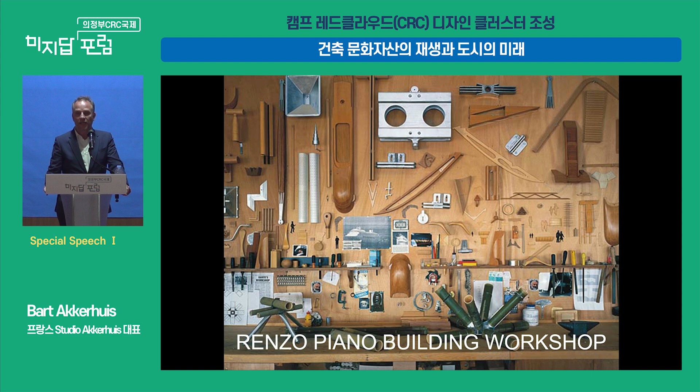He helped you go to the semi-finals in the 2002 World Cup. He's an important man. Another important man in my life is Mr. Renzo Piano, an architect from Italy. He's a bit older than me, he's 87 at the moment, and he has been my master for 10 years. I worked for him for 10 years in his Paris office. Renzo Piano is the head of the Renzo Piano Building Workshop, where I was an associate.

He's mostly famous for Centre Pompidou in Paris. I worked a bit later — Centre Pompidou was built when I was born, so I didn't work on this project. But I worked on several other projects in the Paris office, notably quite some big projects.

I also worked on other different projects, like the Paris Courthouse, the law courts for Paris. The beautiful thing about this is that Renzo always tries to make a place for people in this building. So again, he doesn't just make a skyscraper, but he makes a garden for the workers to go out, even on a high floor at 180 meters. He plants trees with a beautiful view to the Eiffel Tower. I think that characterizes the architecture of Renzo very much.

I also worked for Renzo Piano a bit on some Korean projects. This is Yongsan — luckily or unluckily, it never happened, depending on what side you are. It's a 620 meter tall tower in the Yongsan district. It was the highest in the whole Yongsan region.

Again here, Renzo insisted that although we built this big tower for this corporate client, the top of the building, the last 16 floors, are actually public. For him, it's very important that the public gets the space even at the top of the tower, and it should be for free. It should be accessible for all. I think that quantifies a lot the architecture that I like, and also what Renzo Piano stands for.

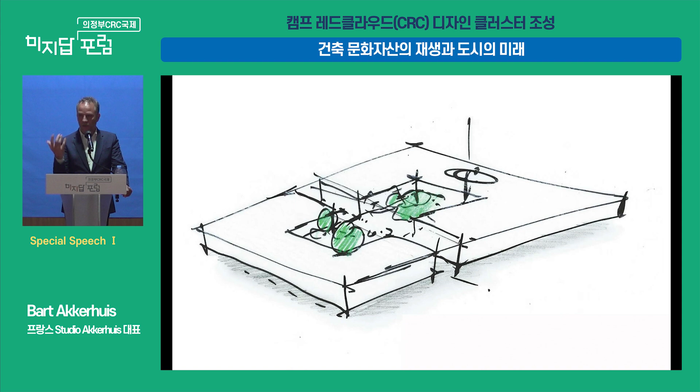But from the inside, our first point of start was to create a place for the people. So we started with the piazza — the Italian word for plaza, which is very important in Renzo Piano's architecture and also in mine. It is the place where people meet. So first we create a place where people meet, where people are invited, and then we build the shops around them. I think that works in the end, because it becomes a place where people meet, where people have joy, where fathers meet their grandchildren, where they have a coffee. And maybe in the end, yes, they go shopping, but that's not the most important place.

So even in suburban America, we try to create this space for people on a very small scale, just a very suburban shopping center, but it works. I think it's always very important to keep in mind that when you construct your buildings or your projects, it should be for the people.

So my firm, I started my firm 10 years ago in Paris. I stayed in Paris. We have a beautiful office in Paris. We are about 40 to 50 people from 19 nationalities, so it's a very mixed group of people, which gives a dynamic influence from different cultures, which I think is important, and this mix is always a very important thing in my office and in the work we do.

And we don't only work in France, but we try to work in the whole of Europe, and even trying to work worldwide. So we have some projects in South America, North America, in the Middle East, in Africa, and we also have some partners in Korea. We're trying to win some work in Korea, and I'll show you some projects later about Korea.

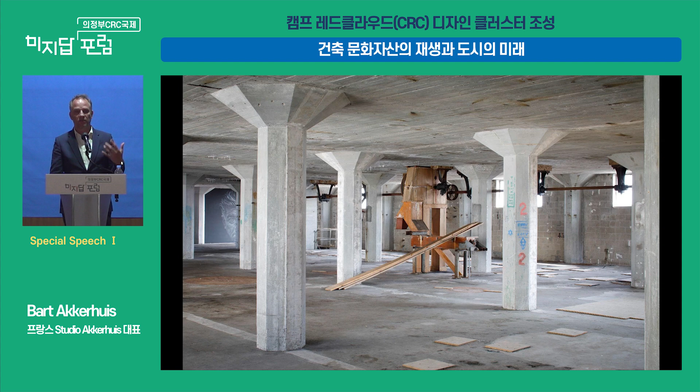Here you can see the buildings during the ages. This is more or less how we found it when we arrived. Sometimes the buildings are quite beautiful from the outside, but mostly they're very beautiful from the inside. There's beautiful concrete structures, and we find beautiful architectural elements. Sometimes it's concrete, sometimes it's iron and brick, and sometimes it's steel and brick.

And as we found that building there, we started to do the buildings one by one. We didn't do everything at once, but we took one step at a time, because sometimes a project like this you need to eat the elephant one little bite at a time, otherwise you won't arrive at your destination. On this model you can see that we transformed all the buildings, but the white part is the buildings that we added, so we also constructed some new buildings, or added some things to the top.

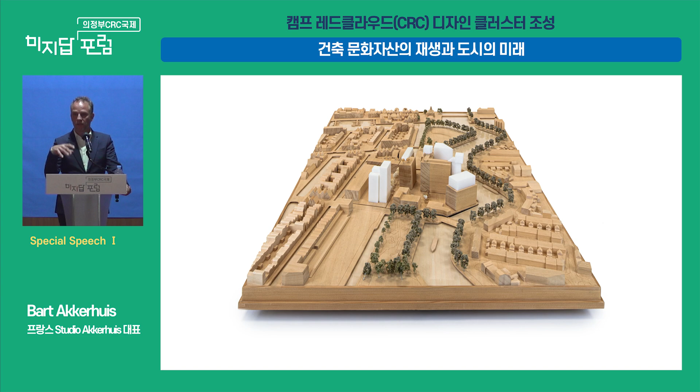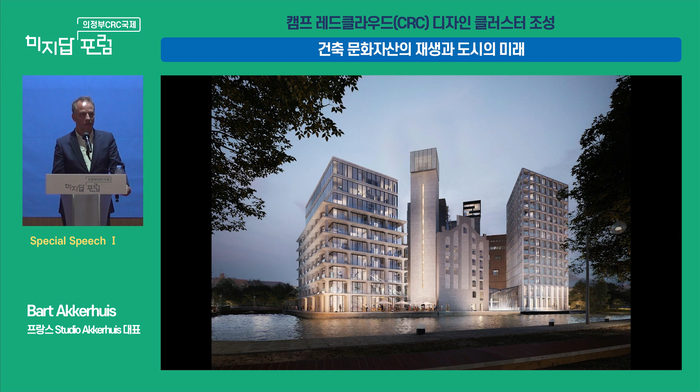This will be the result when it's finished in 2027, so about 3 years from now. So we will be working 13, 14 years on this project, and my client will have been working 35 to 40 years on this project. He was quite young when he started, he's quite old right now.

We already finished some buildings. This is a building we finished, it's a housing project. There's a park designed by Piet Oudolf, the Dutch landscape architect, who is well known for the High Line. He also built something now, at the moment, in Korea, I think.

Here you see parts of the park, but we also built some new structures. The building I'd like to talk to you about today is the Meelpakhuis. It's the building on the left, the brick building with almost no windows. The client wanted to transform this one into a housing project.

I think this is a lesson we can learn for this project. So what is important to keep about this building? Because if you need to make a housing project, you need to make windows, you need to make balconies. Is that really possible with this building?

So we looked clearly at this building, and for us, the structure was actually the most beautiful part. The structure was the monumental part of the building. It wasn't the brick facade, which is quite boring, but it's the structure.

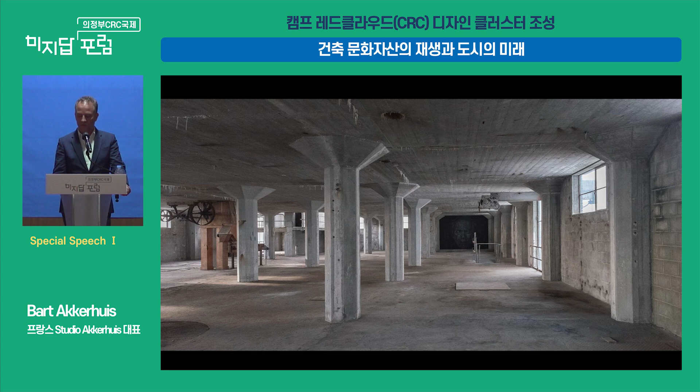So what we decided to do is to peel off the brick facade and leave the structure exposed, then put a new glass volume inside of the structure and put the functions in there.

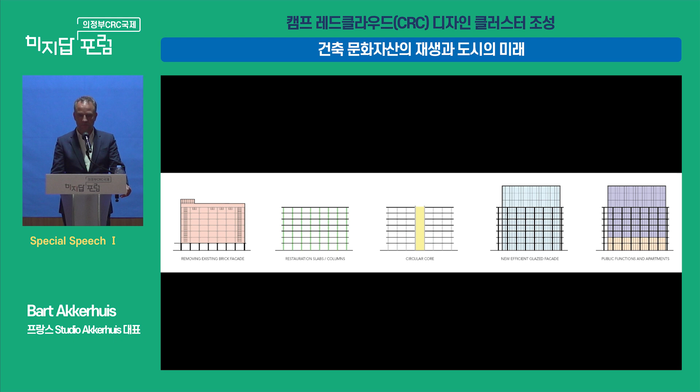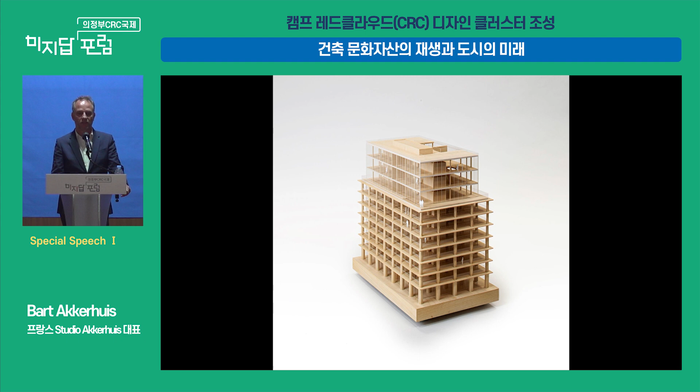On this floor plan, you see that the facade is moved inwards, so it gives this space to the columns outside. Here you see the model.

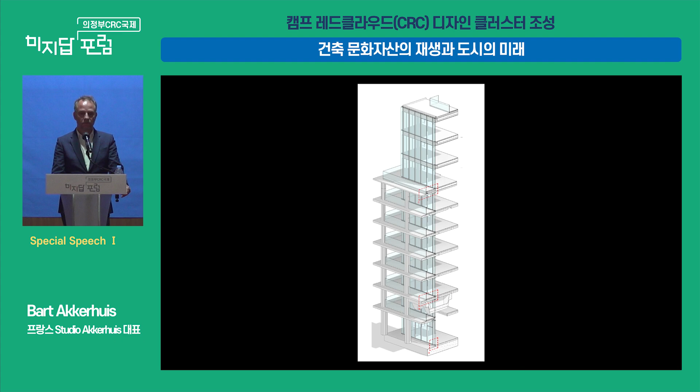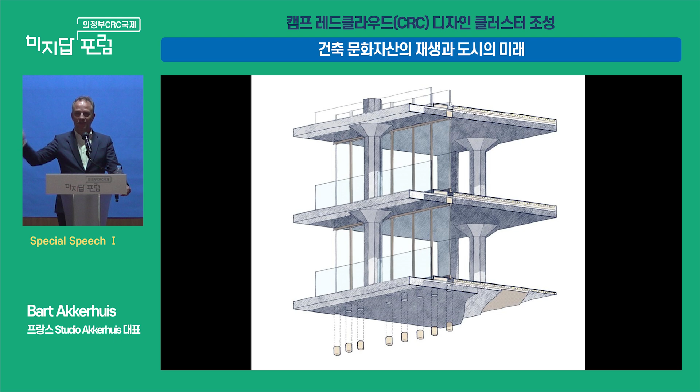Some sections through the building, and you see the glass volume going through. I won't bother you too much with the technical detail, but it's quite complex actually to say, okay, we put glass from outside to inside through the concrete. It becomes a very complicated architecture detail to have the concrete ceiling going through, but I think in the end we succeeded.

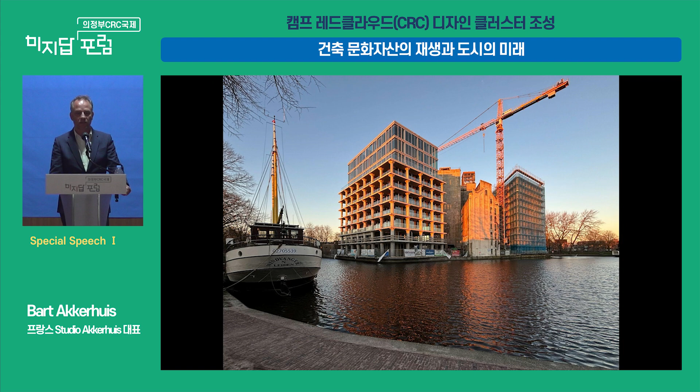So here you see the final result. We took off the brick, the columns become the architecture, and you see the glass volume going through the building.

Oh, sorry, I have to go.

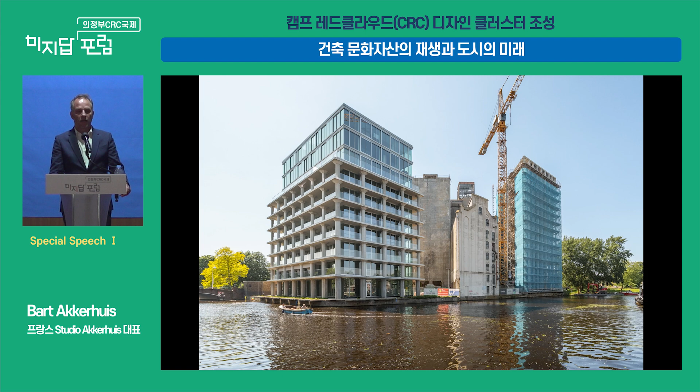Well, it doesn't matter. What's interesting also is, a beautiful Dutch canal by the way, but what's interesting is that you see the columns now are getting smaller from the bottom to the top.

And when you're walking in the building, you can't really see it, but now suddenly, because the columns are exposed from the outside, you can see the columns becoming more slender towards the top.

The second project I'd like to show you in Europe is in the south of France. It's quite interesting, but it's a bit like this site. It has low-rise buildings. There's some beautiful architecture on the side, but not everything is used.

And what the client wanted to have here is a mixed program, but also quite dense housing. Well, dense housing for Europe. I think the housing density in Korea is sometimes a bit more extreme. But it's a beautiful site.

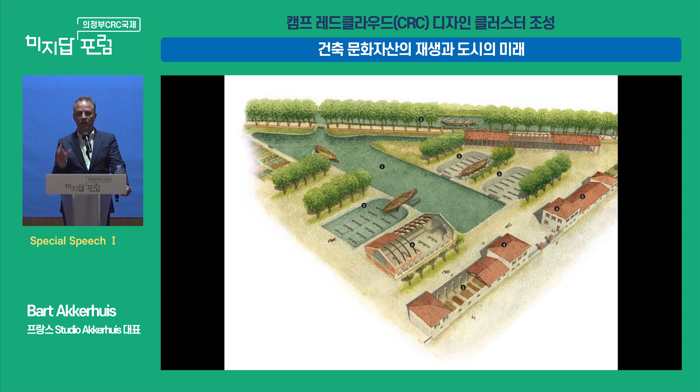It's along the Canal du Midi. The Canal du Midi is the canal that goes from the Atlantic Ocean to the Mediterranean Sea. It's built in the 1600s. And along the road you have beautiful dry docks where they repair the boats. We found some of those dry docks, and those are given on the site.

Then the client wanted, as I said, quite a lot of housing. So where do you put the housing? We couldn't really build it in a tower because Toulouse, where it is built, is a very low-rise city. So we couldn't build a tower.

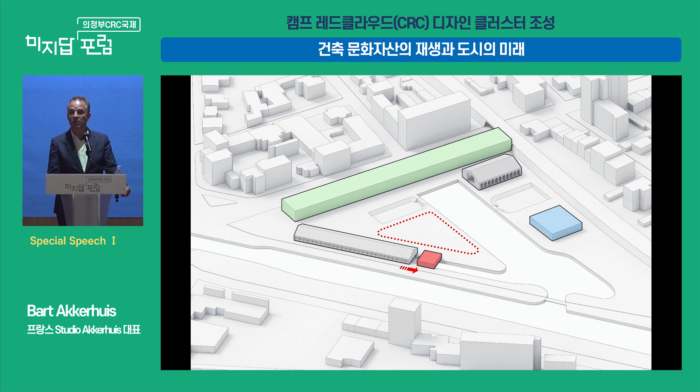So it would be a long bar, or it would be multiple housing on the site. But if we put multiple housing on the site, then we lose the public space. So we decided to have this long bar at the edge of the site to preserve the public space and keep it for the public.

So then we lift it up, so the entry to the site becomes open and still transparent. And we add programs, some to the existing structures, and we add cultural program underneath the housing. And we create connections with the bridge.

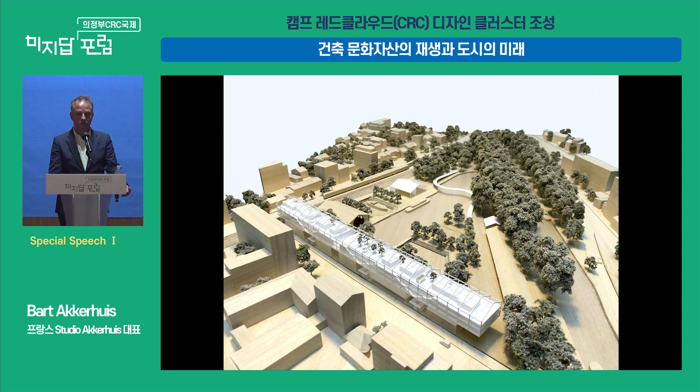So here you can see it's a mix of program, cultural, leisure, restaurants, cafe, co-working, and housing. This is the model we built. This is the view from the other side.

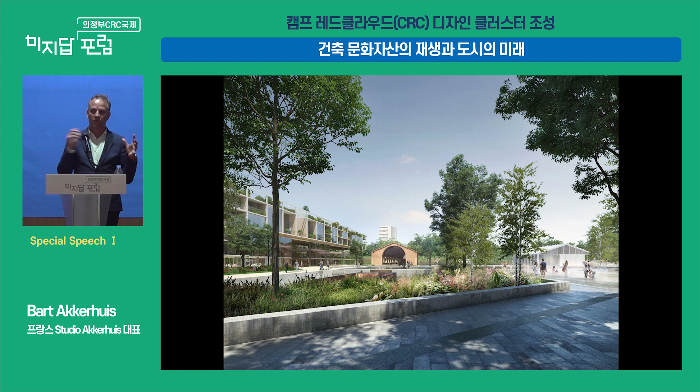Here you can see that you start to create a dialogue with old and new, so you can have the modern buildings and the old buildings together. We create a space for the people. Again, here it's the old shed that we extended with a new shed, old and new together, but it really can work as an architectural dialogue.

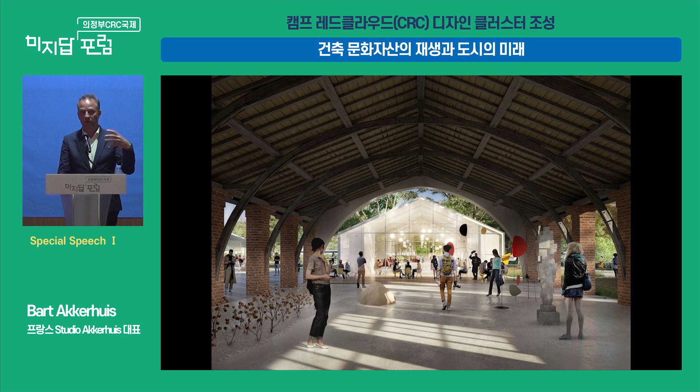We create, because we leave so much space around it, enough room for the cultural aspect of the site, enough room for the people to meet and to have a cultural program and a public space. For example, this structure was used as a concert. Again, leave space for the public, very important. Leave space where people can meet, and create the piazza as such.

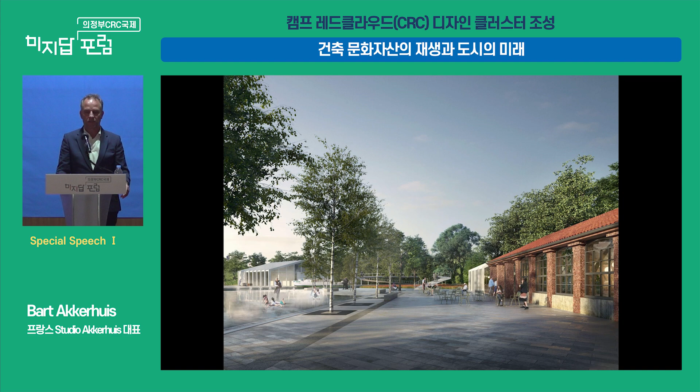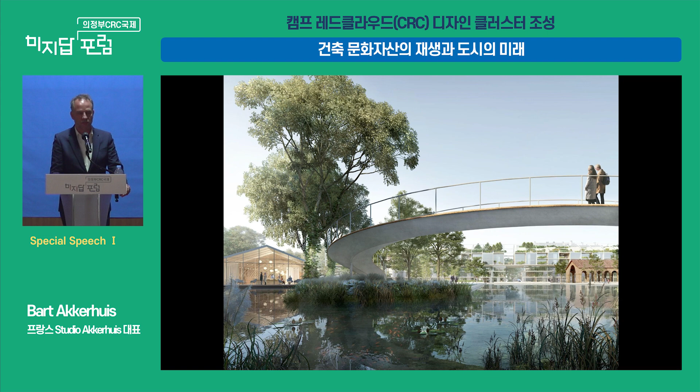Create connections to the other parts of the building. This is a park nearby that was actually blocked off by the water, so we create a new connection towards the park. It's very important to look at the surroundings. Where can you connect? Where can you make the links for the project? I think that's something we always try to do in our architecture.

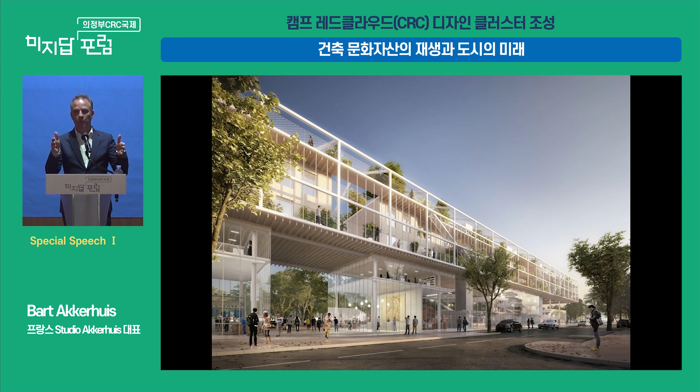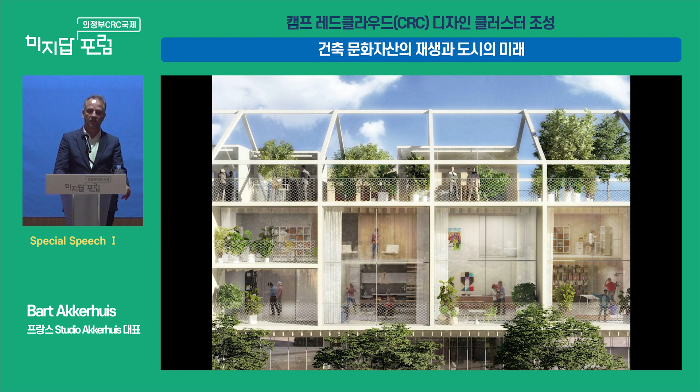And you see here that this is the housing. We lift it up, keep the corner open to get people on the side and to have the transparency so people see what's happening. Again, underneath the buildings, there is a passage, an opening with transparency so people can look towards the building site. And you see the housing with the outdoor spaces, public and private outdoor spaces in the building.

The third project, I have to go fast, I think, so I'll go a bit speedy, sorry about that. The third project is quite similar to this. It's a military site in Holland, which we're working on right now.

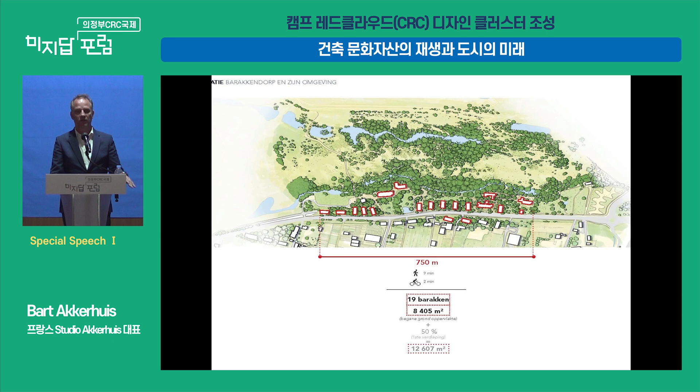It's a beautiful landscape in the dunes next to the sea. What we're studying here is a mix of functions, because next door there will be a very big development in the end. We're not going to build on site because it's in nature, but we're going to build the social functions and community functions in this project. So we're looking for an interesting mix with focus on culture and community.

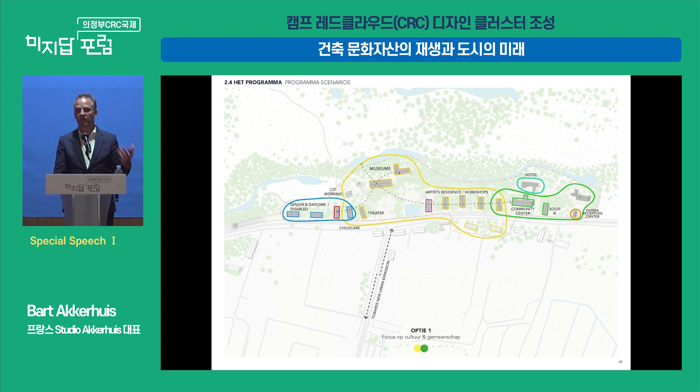Here you see the mix of the different functions. We have support of the neighborhood. There's of course not only the cultural heritage, but also what I call the immaterial heritage. So what happened there? What is the legacy of the history? You also have to think about that. Can there be a museum to commemorate the 1940-1945 war? Can be elderly care, can be child care.

Oh, this is in Korean for me.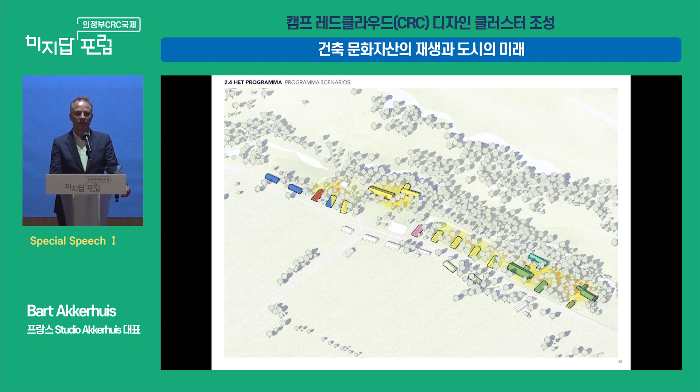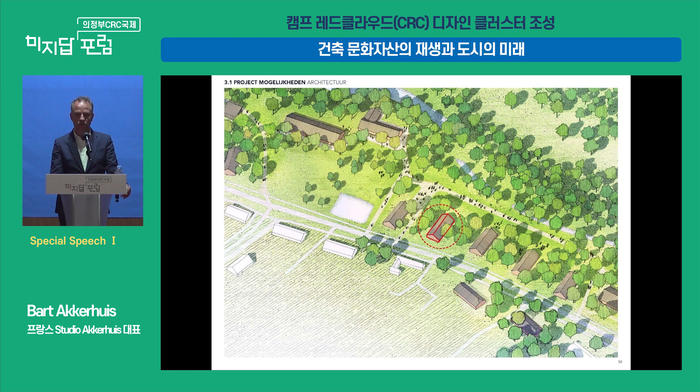Here you see the pavilions on the side, the barracks, and how we see them in nature, and how can we preserve both. So here we're just giving some ideas, and this might be some ideas that you can use on this site, what you can do with the barracks. We look at 4 different types: cultural, housing, working, and social. The culture could be a community theater, or used for exhibitions.

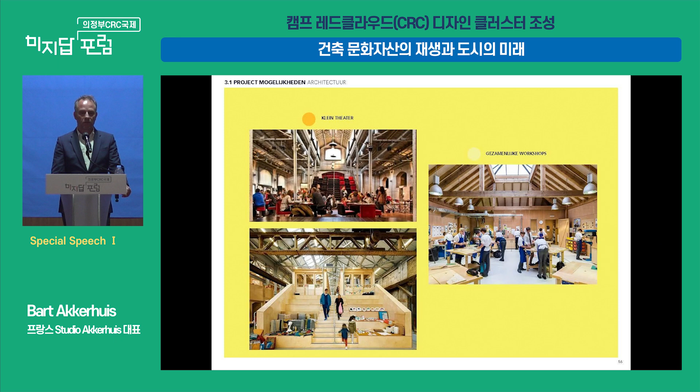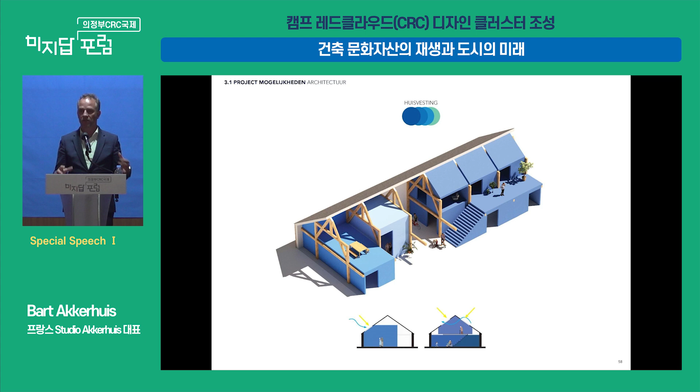Here you see some inspirations we had for this site. Another inspiration: restaurants, workshops, or markets. The housing could be housing for the elderly, where there's assisted living, or daycare housing where the elderly only spend their day, possibly combined with childcare. We keep the existing structure and build something inside it, preserving a structure like this, but trying to build something in there. Here again some possibilities: co-working.

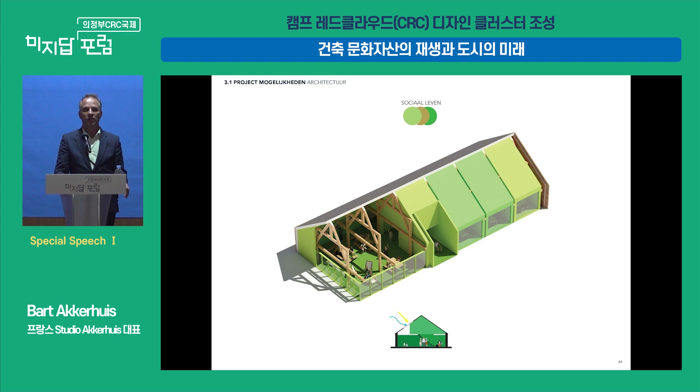Co-working for the local community to have an office space, to go there, to meet. Startups could be there. And there could be a social function. But the possibilities are endless - you could have a restaurant, cafe, wedding venue. But the important thing is we create a space for the community, and I think that's an opportunity you have here also, to create this community.

I think the other interesting thing is you should build for different generations, for the young and for the old, and you should mix those functions. So you really create this sense of community and this sense of place.

Another project where we try to do that - and this is maybe another interesting thing, because I think one of the speakers before said that they have to be very careful how they attack this plan, because it's costing a lot of money and it will be very difficult. But what I think is very important is that as soon as possible you take possession of a site like this.

So you make some instant or pop-up spaces to create that community. So you start engaging the community, you start engaging the artists, and you create a place for the people again.

This is the project I said, which looks a bit like the structure we saw here on site. It's a temporary theater made out of bamboo, designed by us and built by us with volunteers. It's built in 2 days, and taken down in 1 day. And it's supposed to travel, so you can travel to certain areas.

And the good thing about this project is that it is really done by the community, and the community uses this for plays, etc. It has up to 250 seats in different configurations, so it's very flexible. And it's built with bamboo, so very sustainable, low cost. This project really costed nothing - okay, you need a lot of volunteers, but the structural cost and building cost is very minimal.

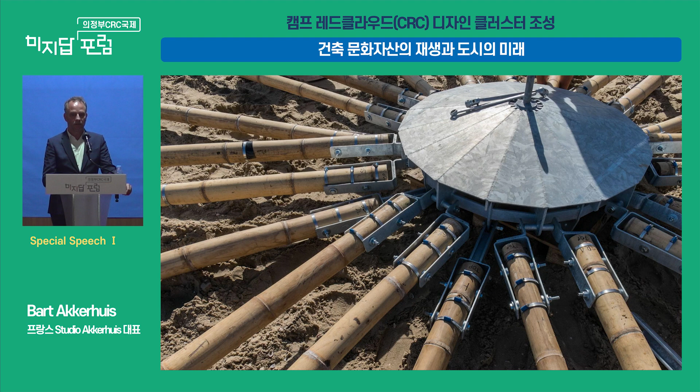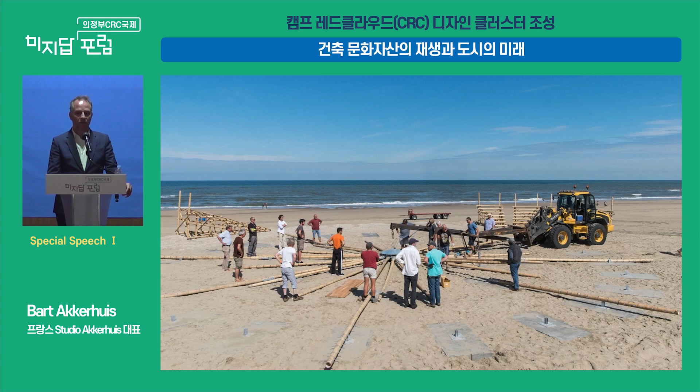So I'll show you very quickly the construction sequence. First of all, we built the center, the central unit. Then we lift it up. And here you see that we put in a central pole. The central pole holds the structure up for the moment.

And then we start folding out the canopy, and we fix it to the vertical poles. It's a very low-tech connection, so everybody can do it. This is one of my architects doing it - well, if an architect can do the connections, then it should be quite simple.

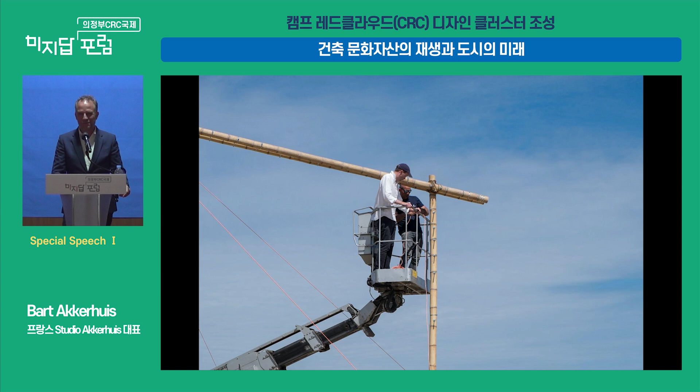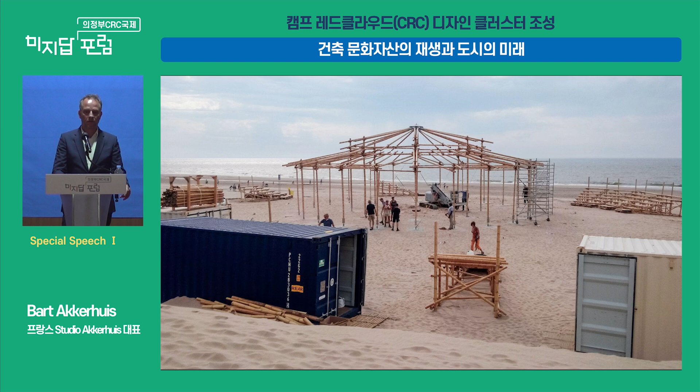Here you can see it. And then we built the inner ring first, and then we built the outer ring slowly. And you look, it starts already to look like the model that I just showed you before. Here's the structure standing up.

And then we add the cover, the tissue. So what we do in the end, because the structure is totally central, we can take out the central pole. It's like a circus tent, actually, the way they build circus tents - they first build the structure, and then the outer ring holds up the structure, so the central pole is then taken away.

And we add seating, which is also made of bamboo, off-site, and this doesn't have to be reassembled every time - it's just put back in storage. We add some soft seating for comfort, so people are comfortable during the performances. And then in the end we have our theater, and you have the spectacle.

And I think it's very important for placemaking - again, engaging the local community. Before you can start, it always takes time, there are procedures, you're looking for money, but try to make already something of this place. Try to already take possession of the site with the neighbors, with local artists and the community.

This is on another location, this is in a flower field. This is not a render, this is a real image.

We've put it on multiple projects - then 5 projects in South Korea with our friends from Archi Workshop, who are sitting here. These 5 public projects we did in Korea have 3 things in common - well, actually 4, because they're not built, that's one. They were all competitions. They maximize the site condition. They create an attractive public space.

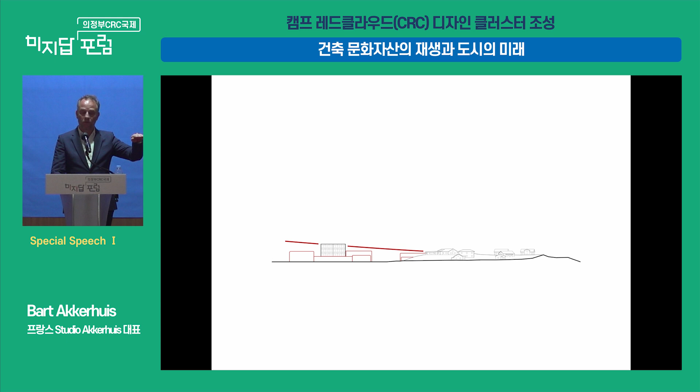So where did we start? What we have is the existing buildings on a little hill. Our idea was to extend this hill towards the left and build a program underneath. So a new history museum built underneath the hill, and above the hill there will become a new park.

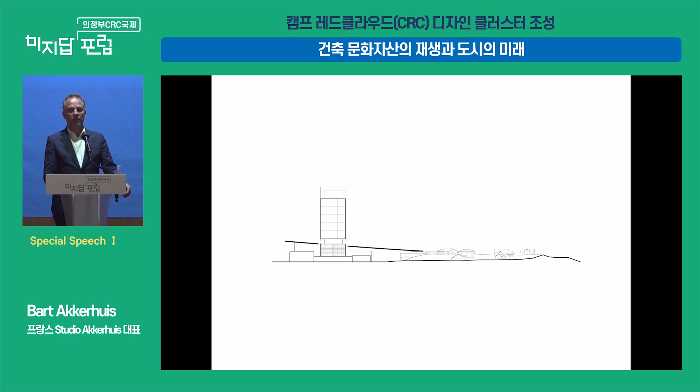Then on the existing OCI building, we built a new landmark building, which will be the Contemporary Art Museum. This new cultural hub will then, in the end, become more than the sum of its parts.

The result is a park around the missionary housing, underneath the History Museum and the landmark Contemporary Art Museum. The good thing about lifting up the park is that underneath it we create the connections.

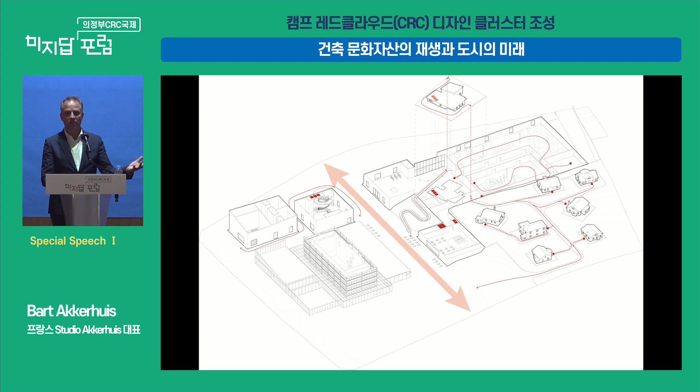We create connections between the housing and the museum, because the History Museum is connected to the houses and they are part of the museum. But we also create connections to the neighborhood, which I think is very important again, to attract your site with the project.

Here you see the first ideas of that park going up towards the Contemporary Art Museum, with the missionary house in front. And here, instead of just a building on that site, above that building we gave back a park.

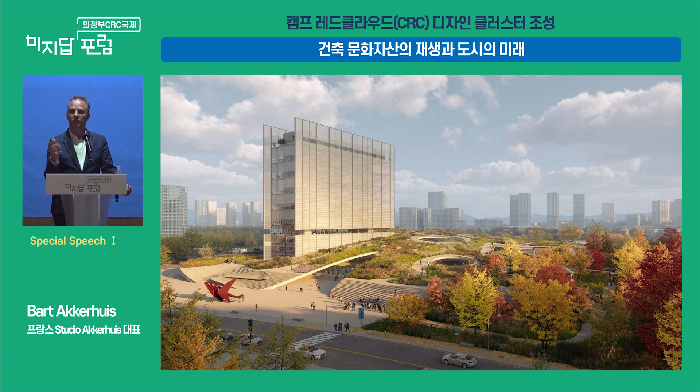And again, that's quite important to look at: what is there for the neighborhood, what is there not just for the people that visit, but how can you give back something to the neighborhood.

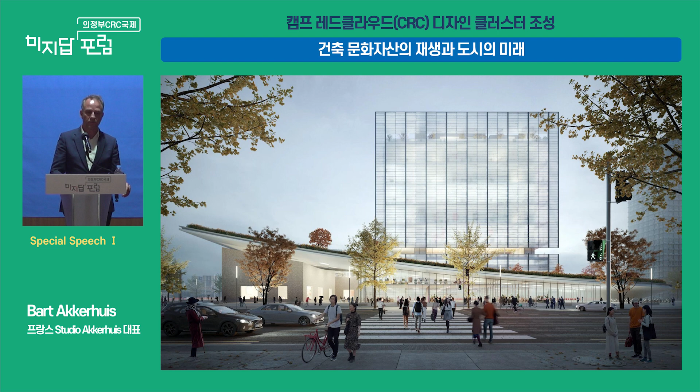There's also a very urban part of it, a facade facing the piazza and the main avenue, and you see the landmark museum.

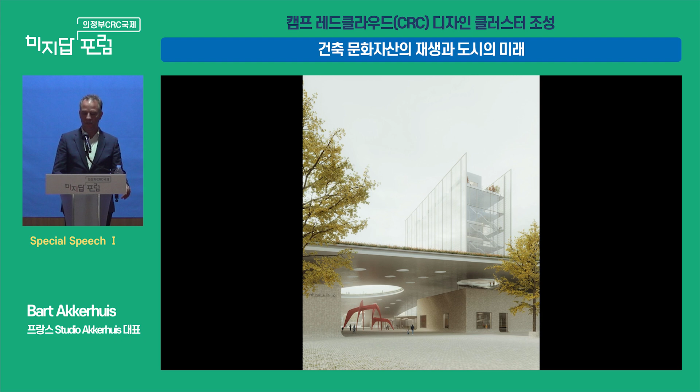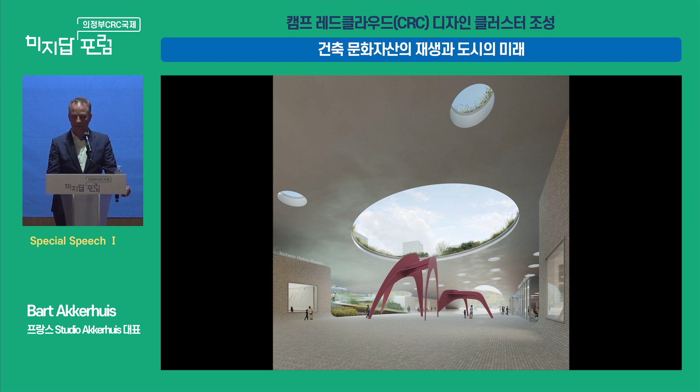By lifting it up, we invite the public underneath the building from this side. The good thing about this is that it creates a covered piazza, which in Korea's harsh temperatures—during summer, which was very warm this year, or the very cold winters with snow and rain—will protect you. And there we have the entries to the museum.

The second project I'd like to show you is a Wholesale Food Market in Cheongju. The question here is, can a 50,000 square meter food market be more than just a generic piece of infrastructure? Normally, if a client asks you to build a food market, it's just a big hall and nothing else.

Here you see a food market. A food market is just a logistical hub: unloading, buying, and offloading. But can we make something out of this giant landmark?

For this region, it's a significant project. As I said, it's 50,000 square meters, and it's quite a small town. So you see the infrastructure has quite a big influence on this project.

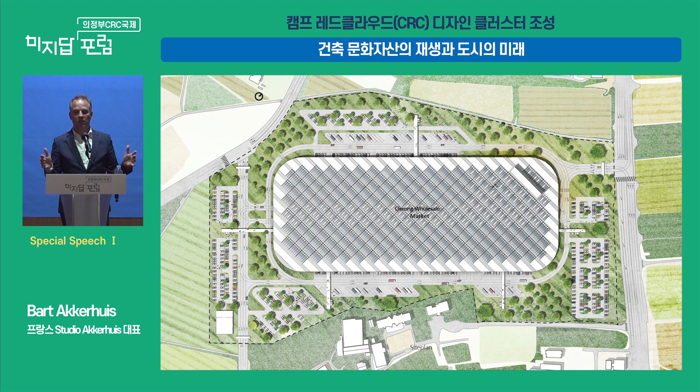What we designed here is the logistical hub under one large roof. We used this roof to create a grid for maximum flexibility, so for future changes it is ready for the future.

We also use this roof for sustainability, to produce solar energy and harvest rainwater.

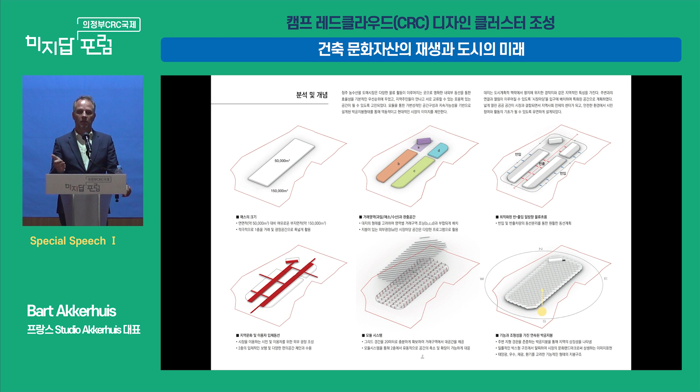By orienting the roof 45 degrees offside, it becomes south-facing, maximizing the energy intake. But also, because we angle it at a 35 degree angle for the sun, we have natural daylight coming in, and therefore we use less energy.

The structure is a timber structure, so from the interior it is a very warm feeling, but it's also very sustainable. In the end, we think our structure will enhance the landscape by its architecture.

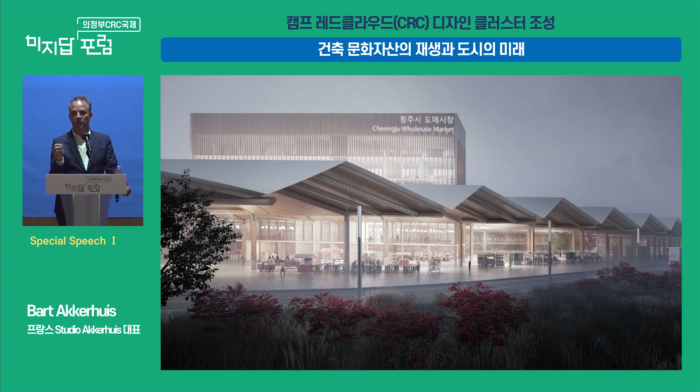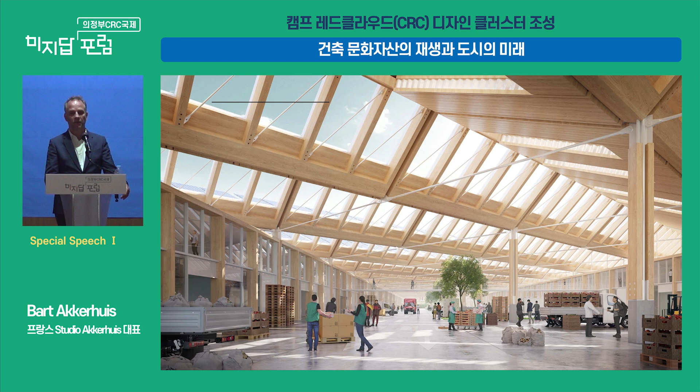This is the covered main avenue of the loading dock. Then we have the fruit market, we have the fish market, and this is the multi-purpose open piazza.

So again, in this site, we created a place for the public. We created a place for the neighbors. So there's a public market.

It's a multifunctional site, can also be held with events. But this is a place where the public can come, where the neighbors can come, buy their fruit, buy their vegetables, and interact, have a coffee.

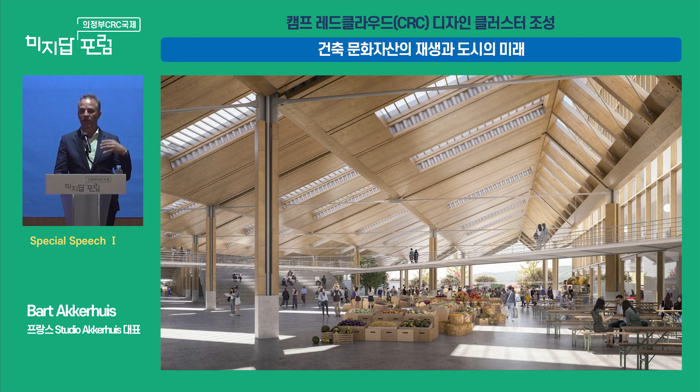I think, again, that's very important. It doesn't just make it an infrastructure hub that is not interacting with the community, but even a market, also a food market, you can integrate into the community.

The third project is the Geomdan Museum Library in Incheon. And here was the big question: how can nature and the urban environment coexist and even enrich one another?

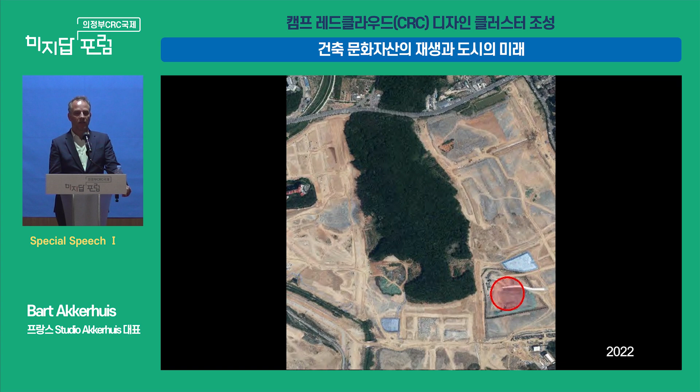The site, as you see it in 2016, is very rural, but then in 2022 they prepared it for construction, so it's almost a tabula rasa, and there's a little piece of green left. On the right bottom you see a little pond. That's our site.

And what we try to do is recreate the landscape that was there before, linking it back. We try to get the continuity of nature back here. So what we do is we propose an eco bridge and use this eco bridge to restore the ecological continuity.

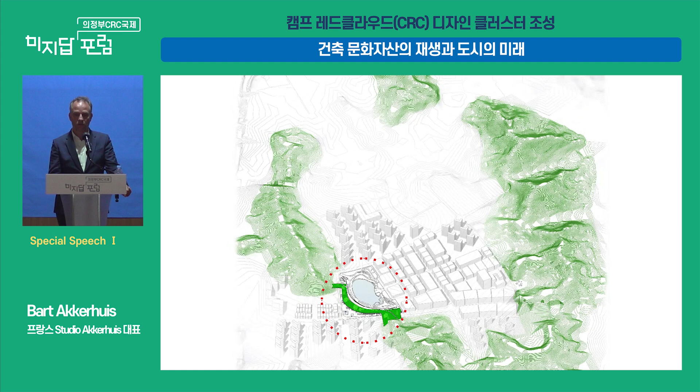And this eco bridge is so important for us that we put the whole museum and all its program and the library underneath this eco bridge.

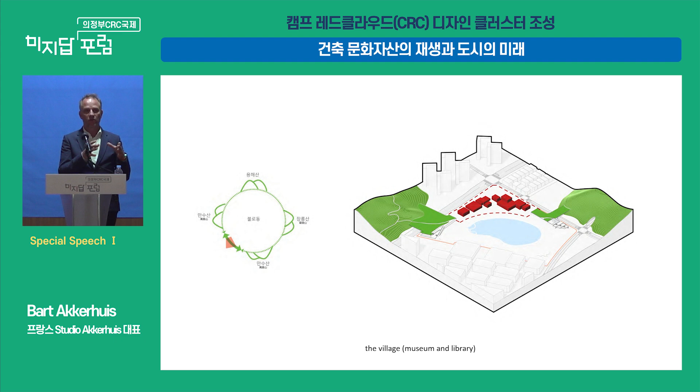So we explore the potential of the site, first by linking the landscape, then a standard, very non-complex modular building on site. So it looks in the end quite an expensive building, but we use very standard building systems to make it affordable.

Then a pedestrian bridge, because you can't combine the eco bridge and the pedestrians together. You have to separate them, but make the same connection. And here the eco bridge for nature.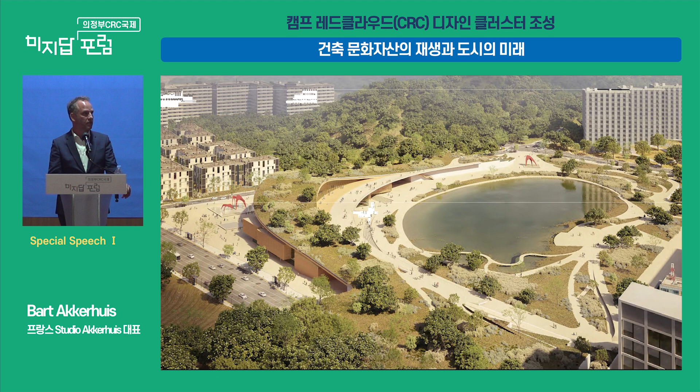And in the end, you see that the two parts of the site that were delinked are now linked again with the eco bridge, which results in a park that goes over the buildings and gives back nature to the city. Actually, it's clearly enhancing the site's conditions.

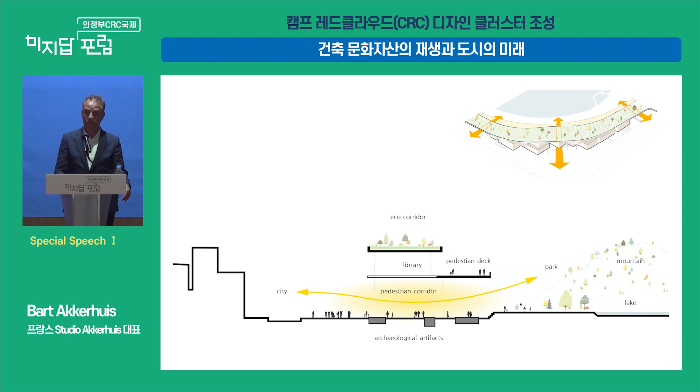So here then we create a gateway from the city towards the park. Because we lift the building up and let the people go through our building, what we do in multiple of our projects, we create this great gateway into the city, into the park.

And then you see the eco-bridge lifting up. I have 5 minutes left, so I go a bit farther.

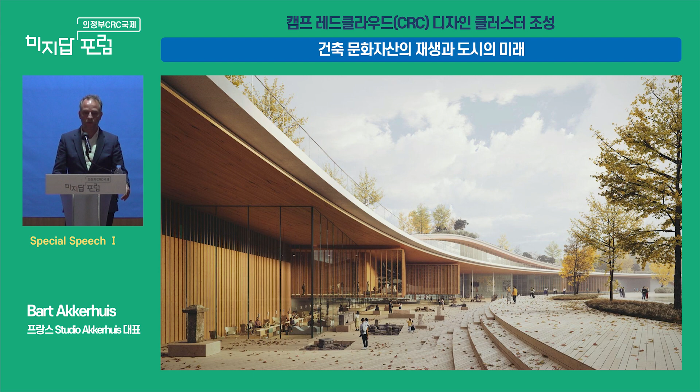Here you see the traditional Korean maru. It's the sheltered exterior space, but there are some archaeological findings on site where we then expose them here underneath the Maru.

The promenade deck. There's the library interiors. And this is the Maru on the library side. And the pond level promenade.

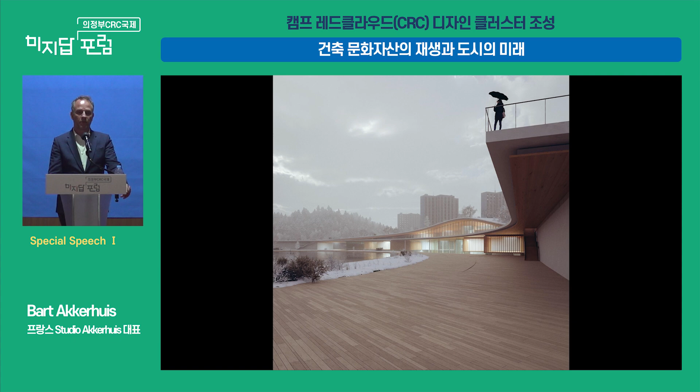Well, I'll go fast now, sorry about this, but the fourth project is the Biennale exhibition in Gwangju, and here the problem was that the Gwangju Biennale is a very important Biennale for Gwangju, hosting 100 artists from all around the world, but it's only every 2 years, and it's too small, so it needed expansion.

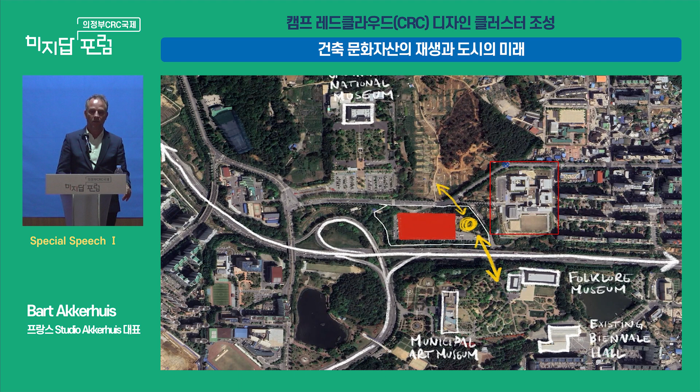So we got a new site, but the site is next to the highway and is in between the cultural amenities for the town. So we need to link all this together. Again, it's about linking the community.

It's in the center of different parks. It connects, it needs to connect the disconnected cultural districts. It's a continuous green network and creates public space for local residents. Everyday spaces for the large residential neighborhoods, actually.

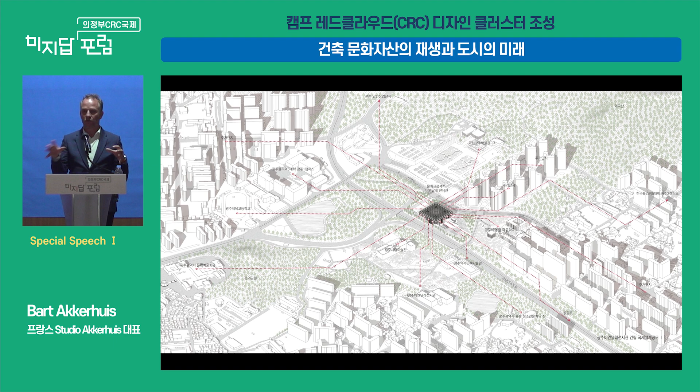So it's almost like a spider in the web, you know - a spider in the web of cultural facilities, but also connecting the local communities towards the center.

Because what we try to do is create again a space for the local community. Normally, a site like this has parking, has a normal exhibition box, which is nothing special, and then a piazza in front.

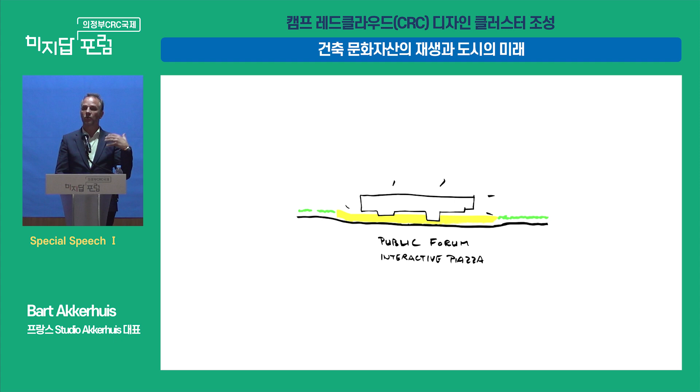What we try to do is lift up the building and create a new public forum. And by floating that building up, we create a new public space that is protected from the environment, from the snow, from the rain, and from the harsh sun, for everyday use.

So again, we try to invite the people coming in. The Biennale is only used a few times a year, once every two years for the Biennale, and then some for other events. But we try to give it back to the people by moving it upwards. I'll go a bit fast because I have three minutes left, I think.

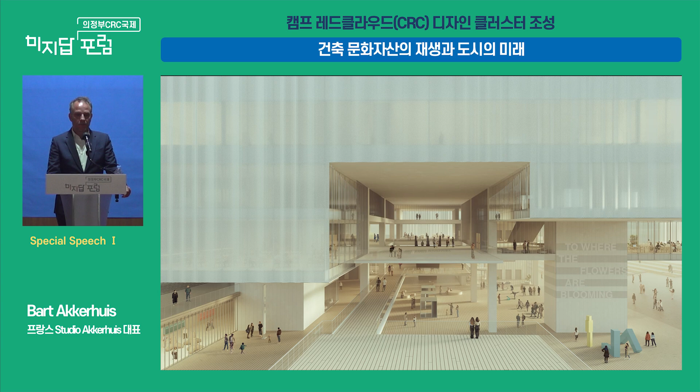Here you see some impression of the public spaces, and public spaces even on multiple levels. And of course, there's also the Biennale main hall.

The last one I'd really like to show you is a project I'm really proud of. We finished it this year. We ended third in the competition, and we were very sad. I was there, close by last night with Professor Lee.

It's a beautiful space. But how can we create an infrastructure that will not only reconnect the city to its waterfront, but become also a sought-after park for all the Koreans? As you know, the Hangang Park is a very popular place for the Koreans, for people from Seoul. But the huge infrastructure is blocking the city from the water.

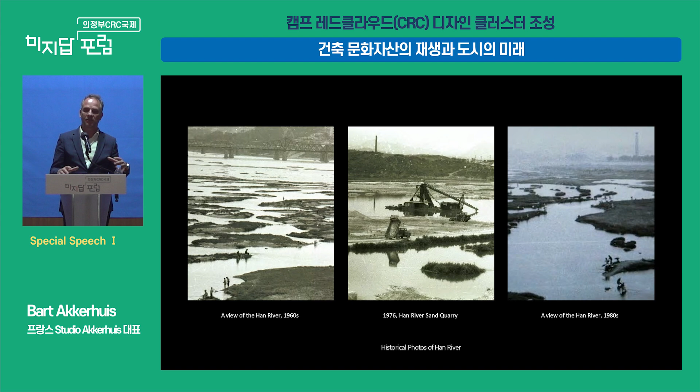Once this was a very soft riverscape where water was flowing in and out with higher tides, flowing from the mountain to the river. It created this carving out of lands, these little islands in the riverbeds, which washed away again with high tides. Now it's just a disconnected piece of land by the Olympic Main Road, bordered by concrete.

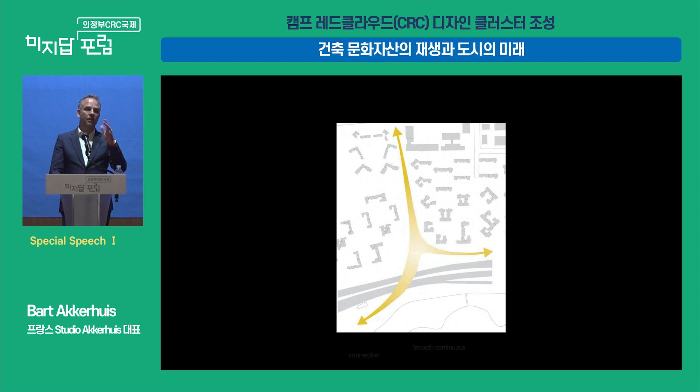So we took inspiration from Korean garden tradition, which is natural, informal, simple, unforced, and seeking to merge with the natural world. Gradually we connect those islands again to the mountains, trying to connect the river to the mountains with our islands. And we're linking the main road back to the river, and then also with the pedestrian way to the highway.

When we position the park, we position it in such a way that it doesn't block the apartments for the residents. We create underneath our park a network, again, for cultural amenities on ground level. On top of the park, we create islands with different programs, and we slowly ramp it up, so it is a very natural gradient going over the expressway.

So there's no issue, you can just go with a wheelchair. It's a very gradual way to go up. And we create views from the river and the skyline from the park.

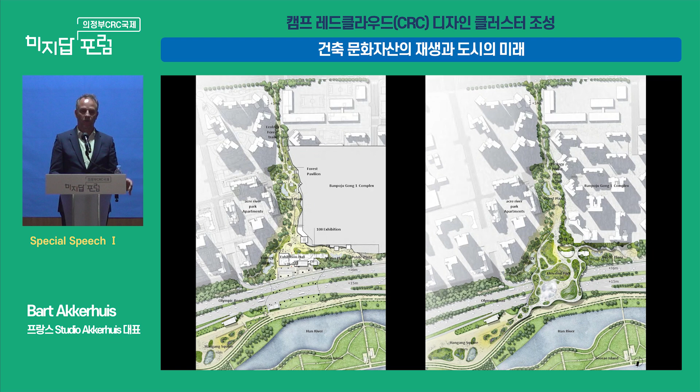Again, here you see the ground floor condition, where there's a cultural facility. We found a building on site, building 108, which is a very important apartment building. We try to keep a part of it, and above it's a continuous park. These are the programmatic islands that we pose up the park, and the result is this new park, a very fluent green park going from the mountains towards the river.

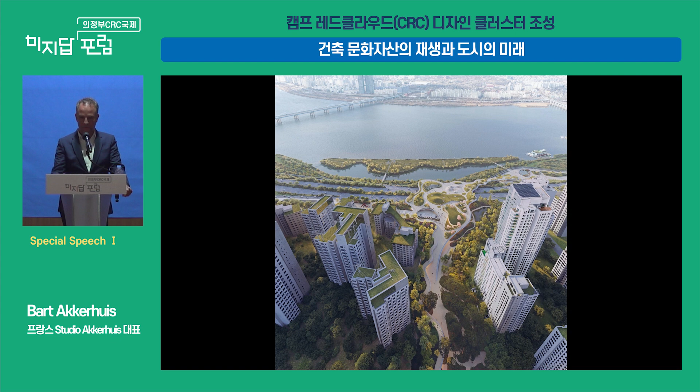You see here the bustling streets. What we also try to do is start with a forest that comes from the mountains, and slowly it opens up towards the river and gets larger, taking you, the visitors, over the highway directly into the riverbed, the riverside, in one continuous flow.

You see again, it's a very fluent way up, going on the riverbeds to the location where we were last night, Professor Lee.

Also underneath, it's a very important space, and here you see this apartment 108 building. It's a several-story high building. We couldn't keep everything, but we decided to keep part of it again, so you can cut pieces of your cultural heritage and transform it into a cultural center. So again, we make places for the public and have a memory of the past.

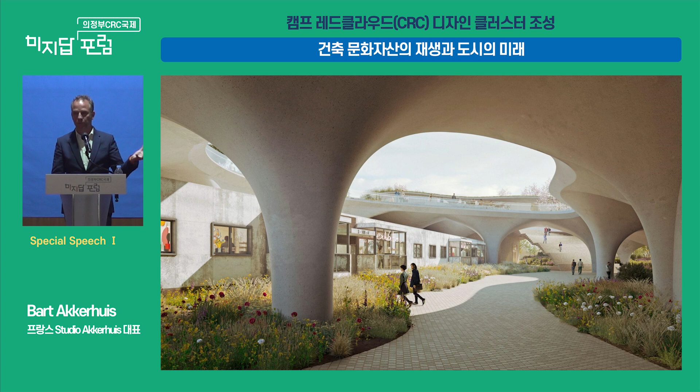I think, again, that's very important, what you can see here. We also have a very mineral, urban fabric together with the natural landscape, and in the end we restore this missing link from the mountains to the river. The structure itself is an organic structural system, but based on a very rational grid to keep costs low. But it creates, again, as you saw in the image before, a landscape on its own.

So coming back to the theme of the symposium, regeneration of architectural cultural assets and the future of the city, I think we should create places for people in dialogue with cultural heritage and with nature, to create thriving communities rooted in the past, built in the present, and ready for the future.

I think my old boss did it well with Centre Pompidou in Paris. He respected the cultural heritage, but he wasn't afraid to make something else. He left half of the site for the public, and made a new destination for public and culture. It should be public spaces for everybody to enjoy.